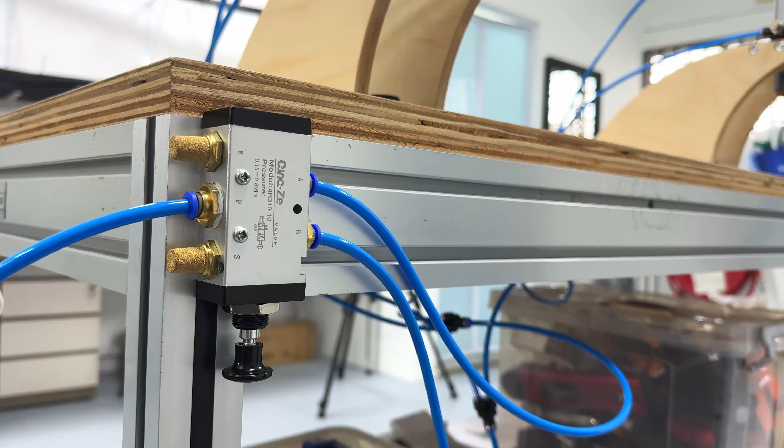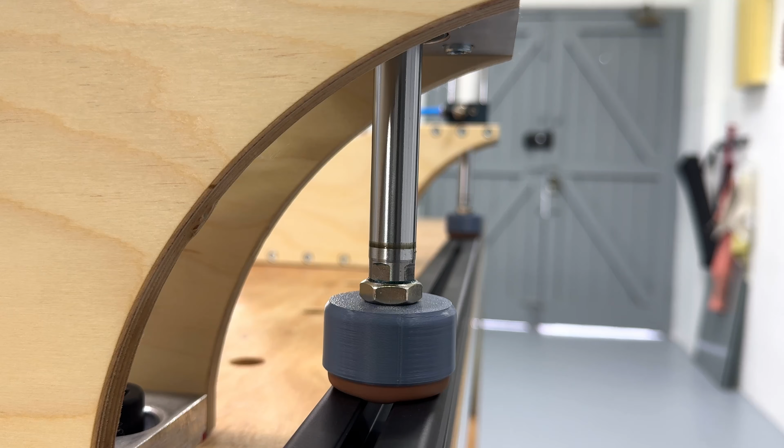One lever, and that is all it takes. Pull it, and two pneumatic clamps come down simultaneously, holding the aluminum extrusion firmly in place on the table. Push it back, and they retract, clean and instant, ready for the next piece. But it was not always this simple, and to understand why this matters, I have to take you back to

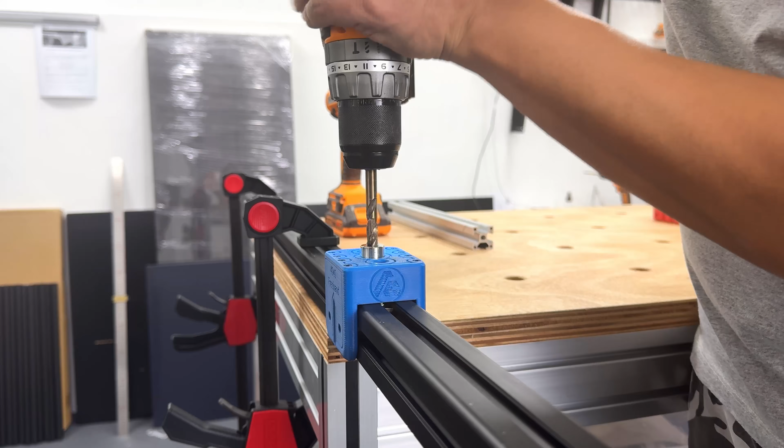where this all started. When you work with aluminum extrusion, drilling is unavoidable, and the reasons are many: blind joints, internal connections, and a whole lot more. Almost every build requires holes to be drilled, and they need to be drilled precisely, in the right spot, at the right depth, every single time.

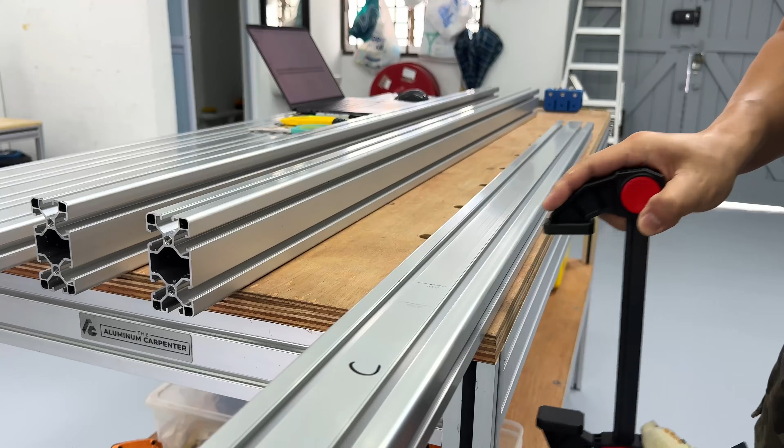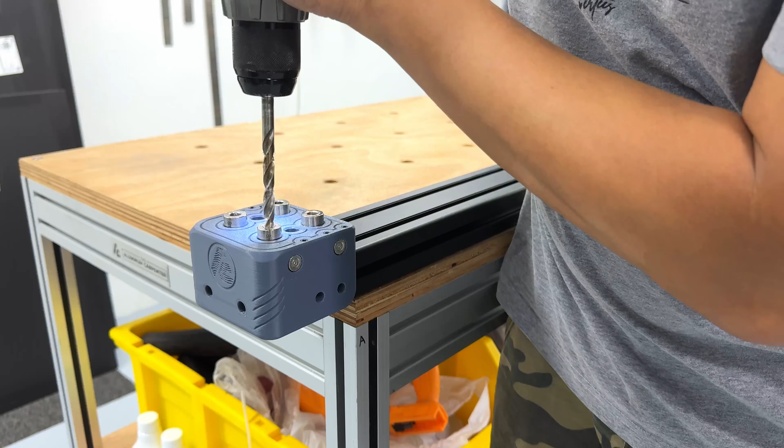And every time a piece needs to be drilled, it has to be secured first, because that is non-negotiable. A workpiece that is not properly clamped is a genuine safety risk. The drill can cause it to shift, it can slide off the table entirely, and the bit can catch, snap, and damage a piece of extrusion you have already cut to size.

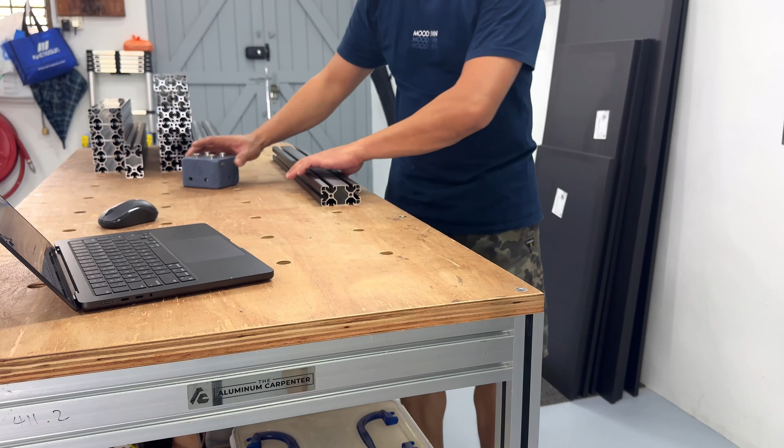My solution for years was the F-clamp, and it always took two of them, every single time. Position the extrusion on the table, place the first clamp, tighten it down, then the second clamp, tighten that clamp too, and only after that can you drill. When the hole is done, loosen the first clamp, loosen the second, walk them back to the rack, pick up the next piece and repeat the whole thing all over again.

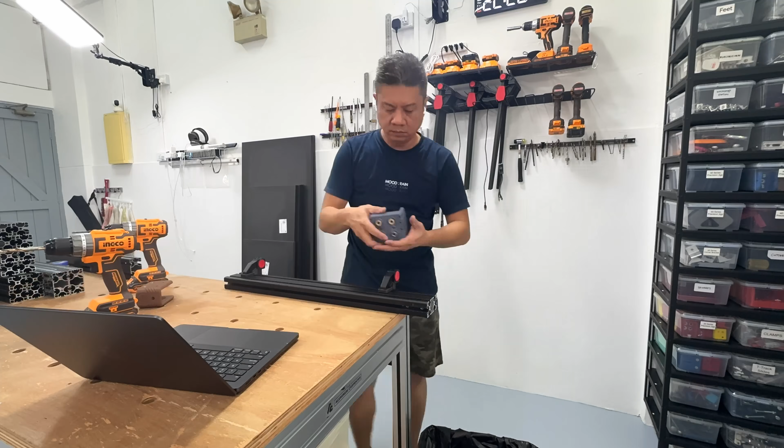And honestly, it works, and there is nothing wrong with it. But when you are processing many pieces in a single session, the repetition adds up faster than you think, and the interruption to your flow adds up just as fast. Every time your hands leave the work to handle a clamp, your momentum breaks. And in a one-man workshop, momentum is everything.

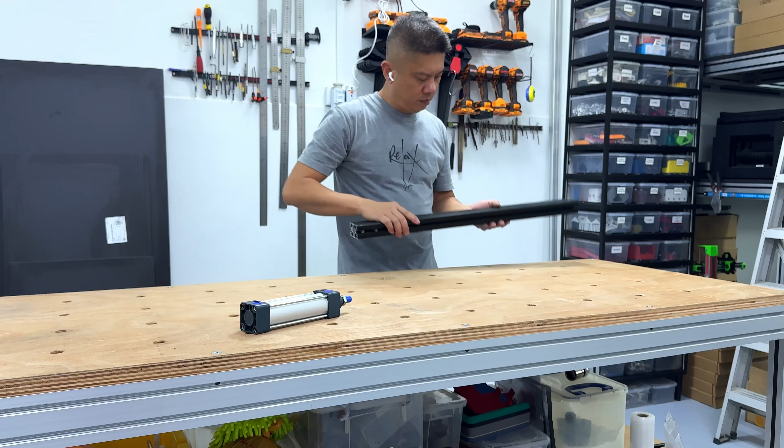So I kept thinking, there has to be a way to eliminate this entirely, and let a machine handle the clamping for me. And that thought became this build. The concept is straightforward, and it starts with two pneumatic press units mounted onto the MFT Centerpiece Assembly Table for the duration of any drilling session.

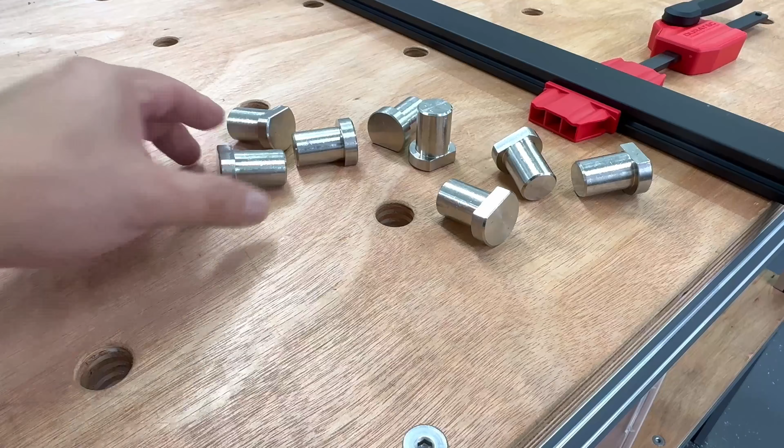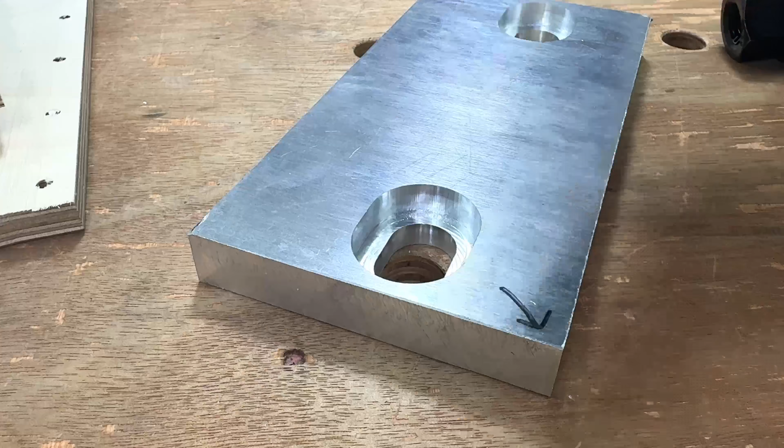If you have not seen my MFT Centerpiece Assembly Table video, I will link it in the description below, because that table is the foundation of a lot of what happens in this workshop, and it is clearly the main reason this entire pneumatic project works as cleanly as it does. The dog holes machined precisely into that table surface are what allow every press unit to be positioned and locked without any guesswork, and without any permanent modifications to the table at all.

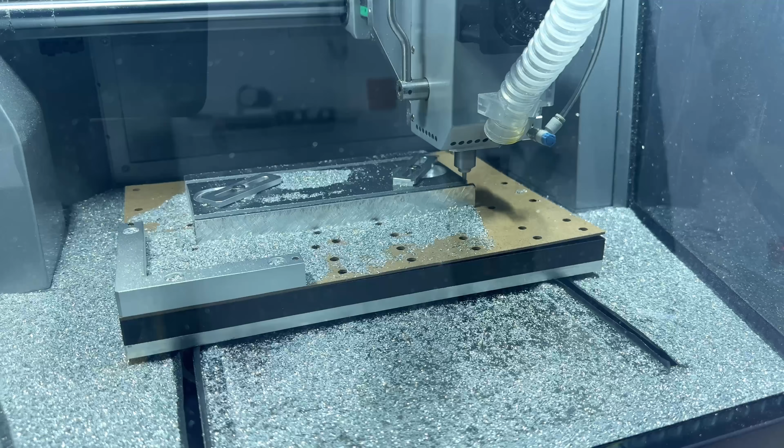Each press unit consists of one pneumatic cylinder, housed between two custom-cut birch plywood panels that form the supporting structure, and below that, a precision-machined aluminum block anchors the entire unit firmly down onto the table, forming the base, and another from the top to secure the pneumatic cylinder in position, pointing it down.

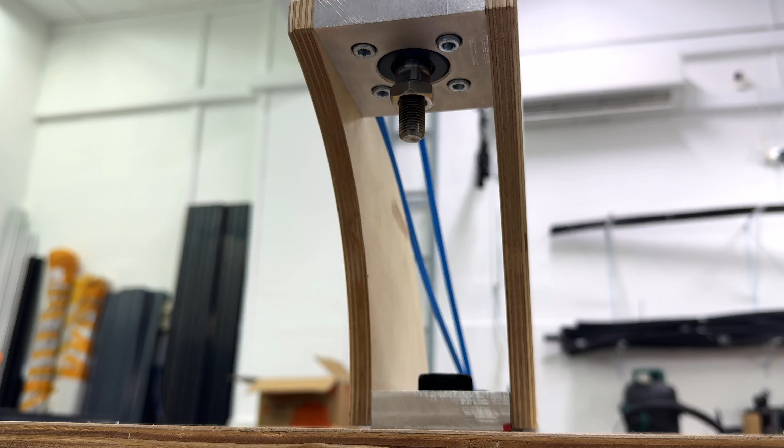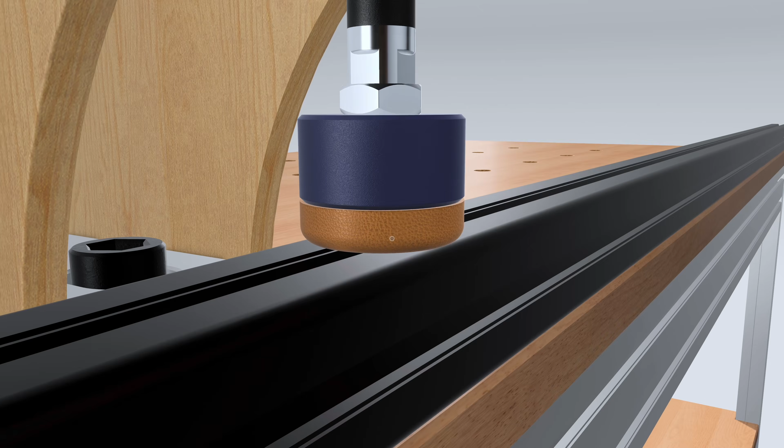When activated, the cylinder shaft extends downward, pressing a custom contact foot onto the extrusion below, and that contact foot is 3D printed with a silicone pad bonded to the tip so it holds the workpiece firmly without leaving a single mark on the surface. Both units are triggered by a single manual lever valve. Pull it, and both come down together, push it back, and both retract at the same time.

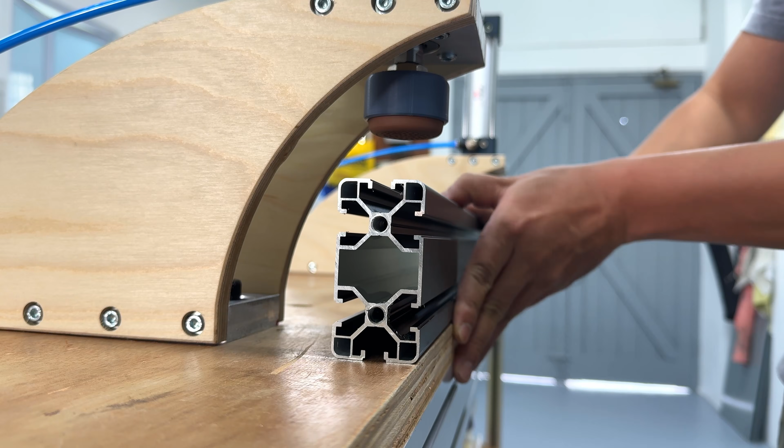The placement is deliberate, with one unit at each end of the workpiece, and in most cases, two presses are more than enough to hold the extrusion firmly in place. When a drilling session is complete, the entire setup comes off the table and goes into storage, ready to be deployed again for the next session. No permanent modifications to the table, and no dedicated space taken up between sessions.

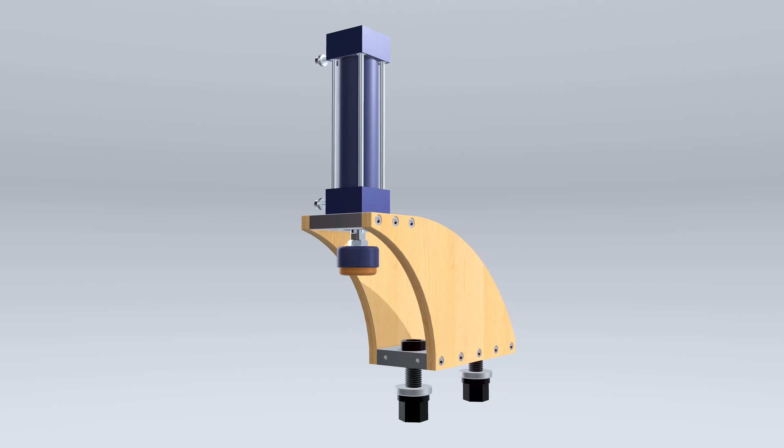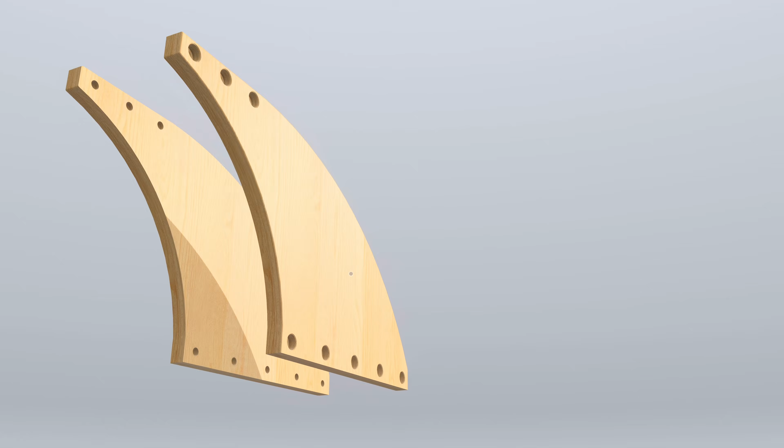Clean, modular, and practical. To make this work, certain components had to be custom-made. The aluminum blocks, machined to precise dimensions, and the birch plywood panels, cut to the exact profile needed to cradle each cylinder correctly. Beyond those, the remaining hardware was sourced off the shelf, fasteners and fittings that drop straight into the dog holes on the MFT table surface.

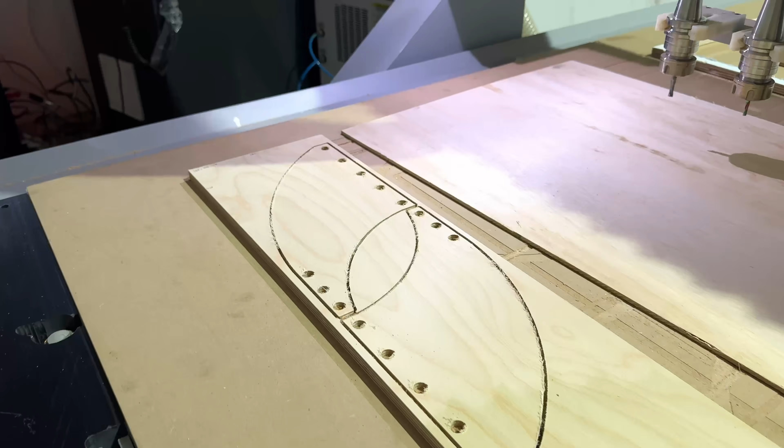Now, the plywood parts are large, far too large for a desktop CNC machine, but the aluminum blocks, those were a perfect job for this machine.

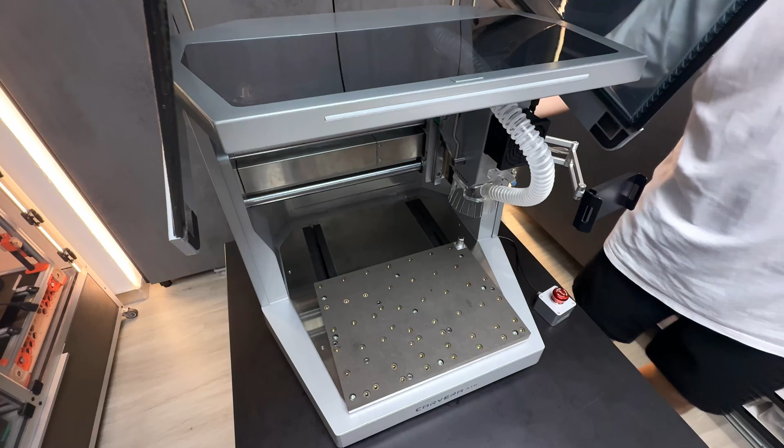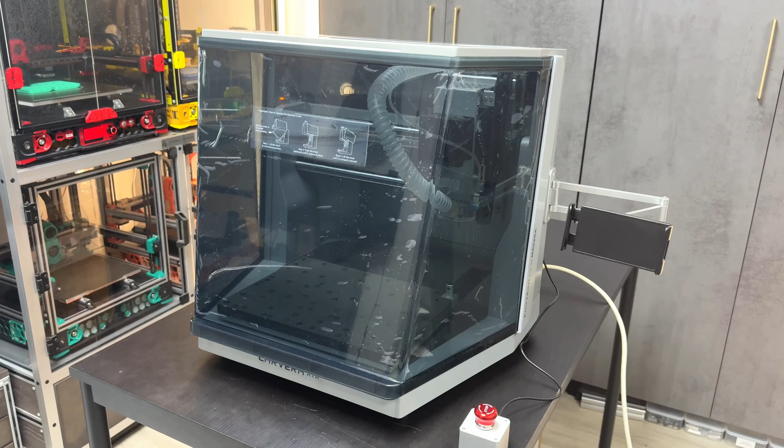And I do mean the very first time, because I have never operated a CNC machine before this project. I did not know the software, I did not know the feeds and speeds, and I honestly did not know what to expect when cutting metal on a desktop machine.

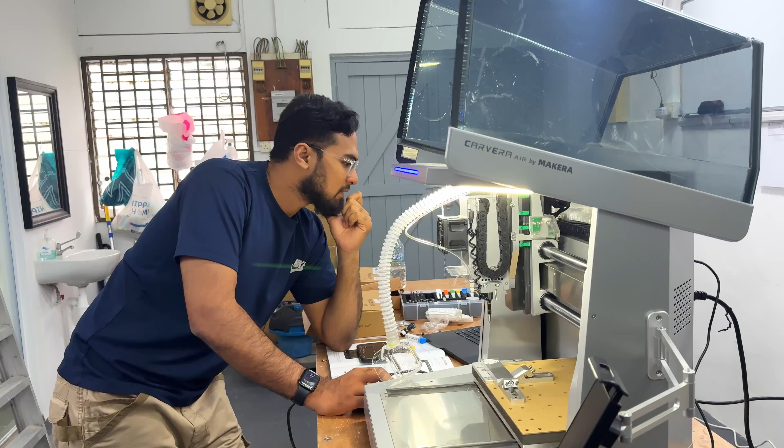Fortunately, I did not have to figure it out alone, because this is Iskons. Iskons is a maker and fabricator who works with large industrial CNC machines. And when I brought this project to him, he stepped in immediately. And without him, none of what you are about to see would have been possible.

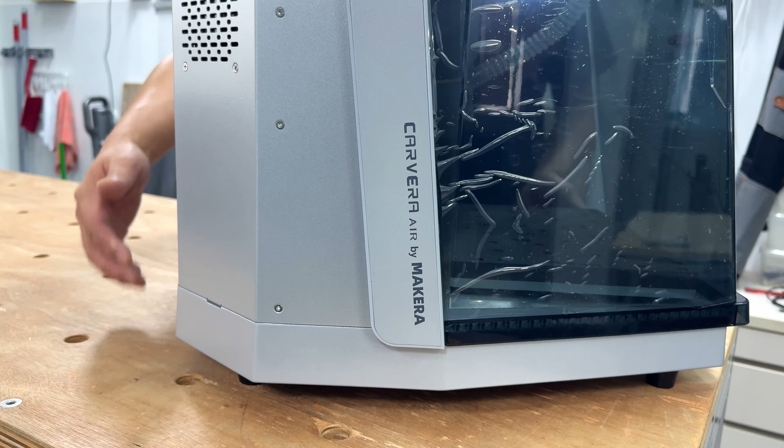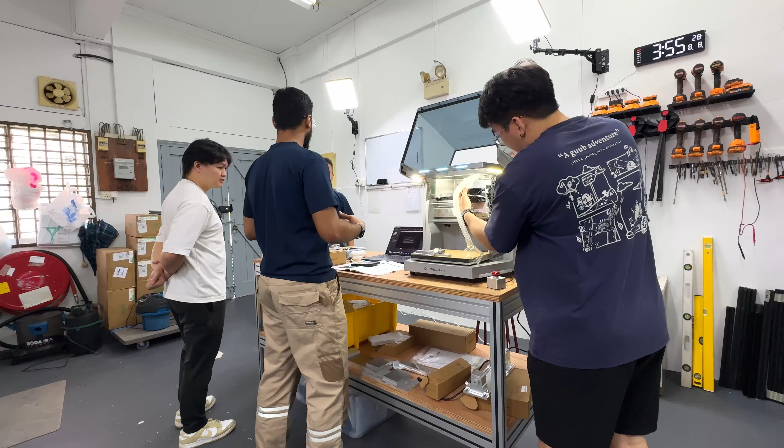The Makera Carvera Air is a desktop CNC machine, compact enough to sit on a workbench, enclosed for safety, and designed to handle a range of materials, including aluminum. And that last part is what mattered most to me, because aluminum was exactly what we needed to cut.

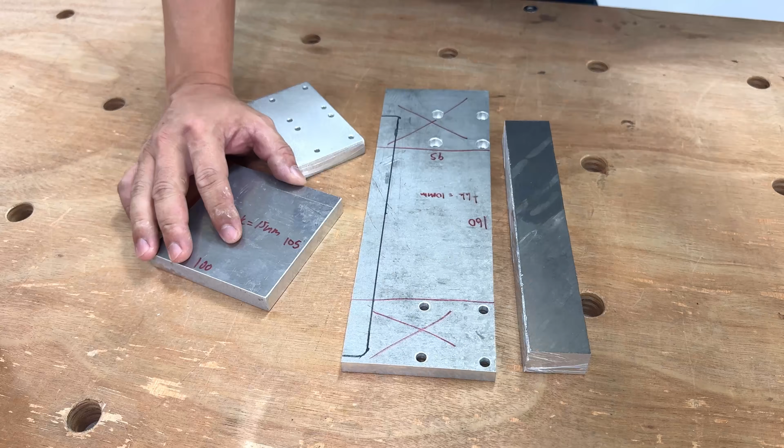We loaded the machine with the design files, set up the first block of aluminum, and these are salvaged material from previous aluminum projects, so nothing really goes to waste. And we immediately got to work. And what happened next was not entirely smooth, but that is the honest story, and I'm going to tell it to you exactly as it happened.

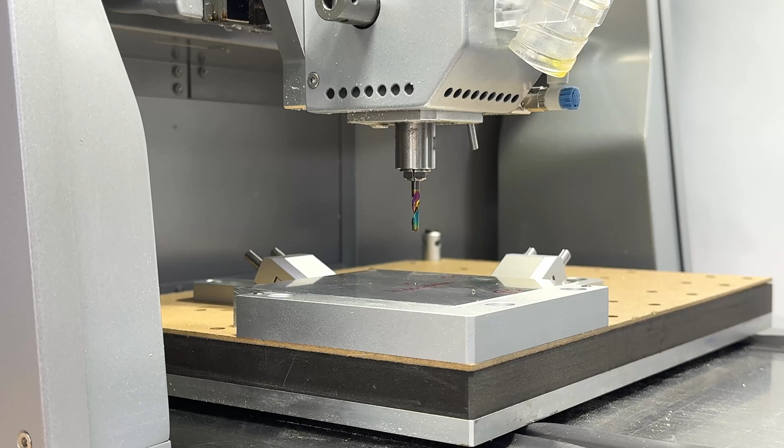Aluminum is unforgiving, and I say that with respect. Cut too fast, and the bit overheats and snaps. Cut too slow, and the material work hardens, which also destroys the bit, and the window of acceptable feeds and speeds is narrow, so finding that window costs bits. And we went through several of them before we found the right combination.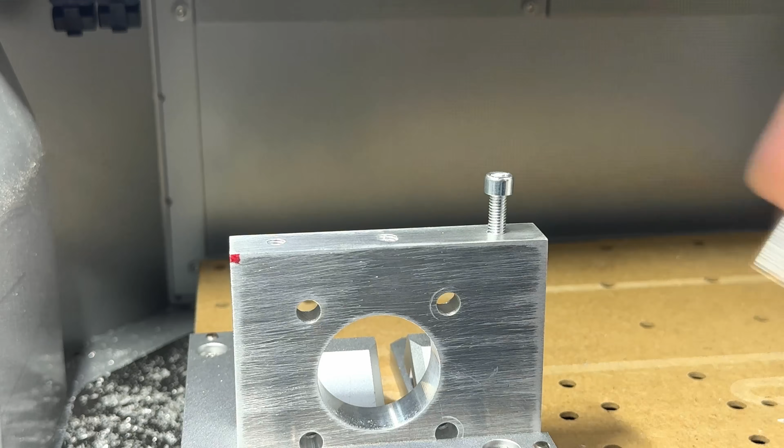Each broken bit was essentially a data point. Too aggressive, back off, try again, adjust the depth of cut, adjust the feed rate, run a test pass, and evaluate. Iskons drove this entire process, and his years of experience with industrial machines gave him the instinct to know exactly what the machine was telling us. The sound of a healthy cut versus a cut that was about to go wrong.

And when we finally found the sweet spot, the difference was immediate. Clean chip evacuation, consistent cut depth, and the Carvera Air working exactly as it should. The aluminum blocks came out precise, with sharp edges, clean faces, and accurate dimensions. Exactly what the design called for, and for a desktop machine cutting salvaged aluminum blocks, that result genuinely exceeded my expectations.

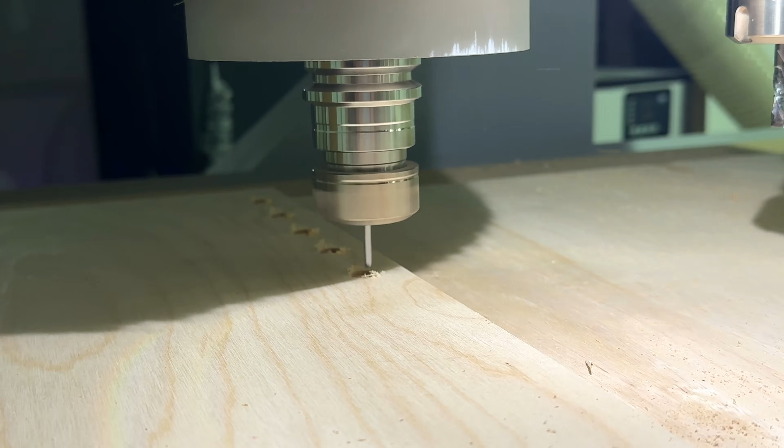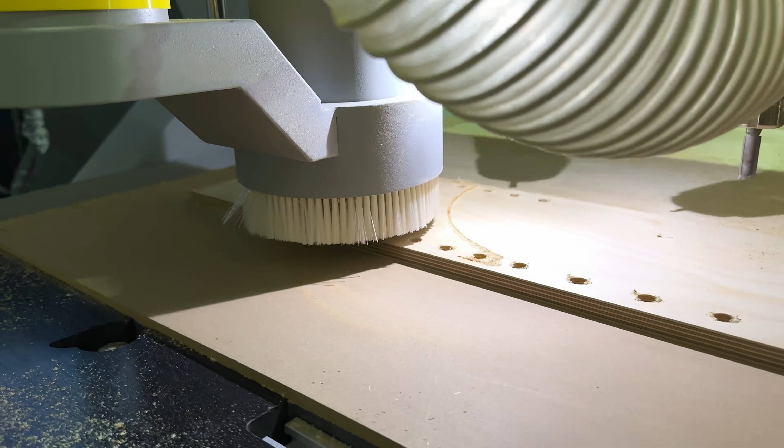While the Makera handled the aluminum, the birch plywood panels were cut on a completely different machine, because Iskons runs a large industrial-grade tool changer CNC in his own workshop, and that machine cuts through birch plywood without breaking a sweat. The plywood panels that form the housing for each pneumatic cylinder were cut on that machine, because they are far too large for any desktop CNC, including the Carvera Air. And between the two machines, every custom-cut part in this build was fully covered.

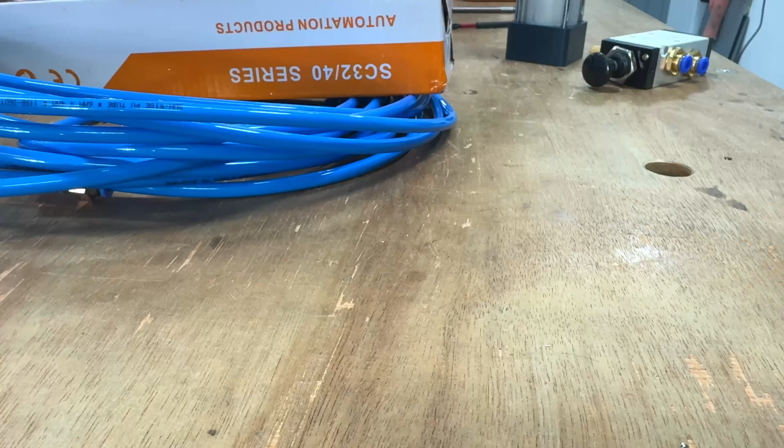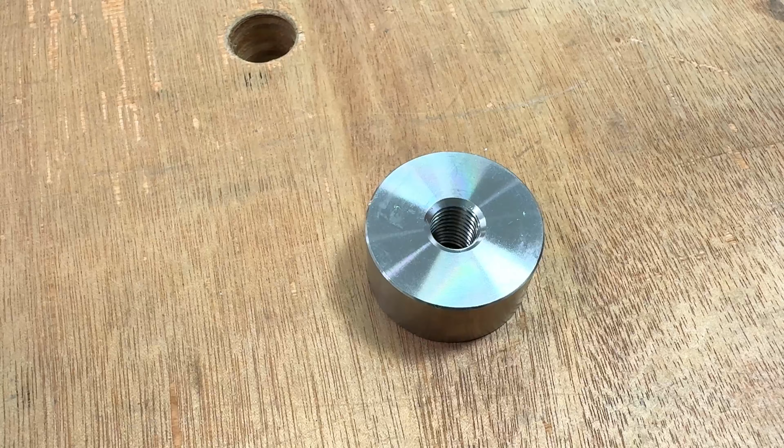The remaining components were sourced off the shelf: the pneumatic cylinders, the fittings, the airlines, and the manual lever valve that triggers both units simultaneously. Standard parts, proven parts, and nothing exotic. Except for one: the press foot. My original intention was a full metal press foot, a stainless steel part with an M12 threaded hole through the center, designed to thread directly onto the pneumatic cylinder rod.

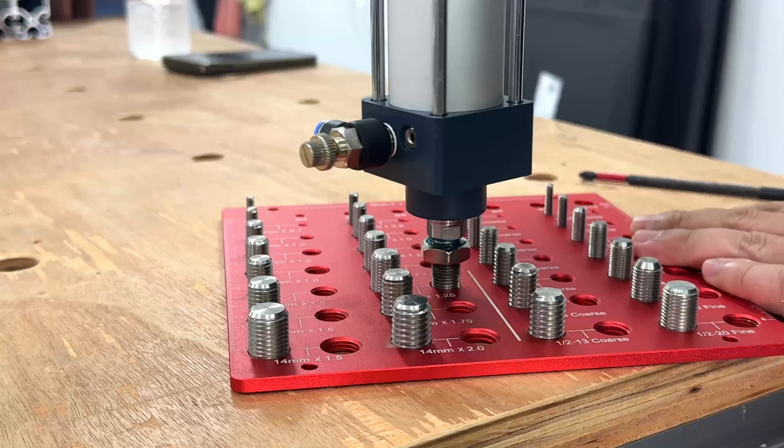I sourced the part, it arrived, and the thread pitch was wrong. M12 was correct, but the pitch was not 1.25 millimeters, which is what the pneumatic rod requires, and the part looked right, it measured right, but it simply would not thread on.

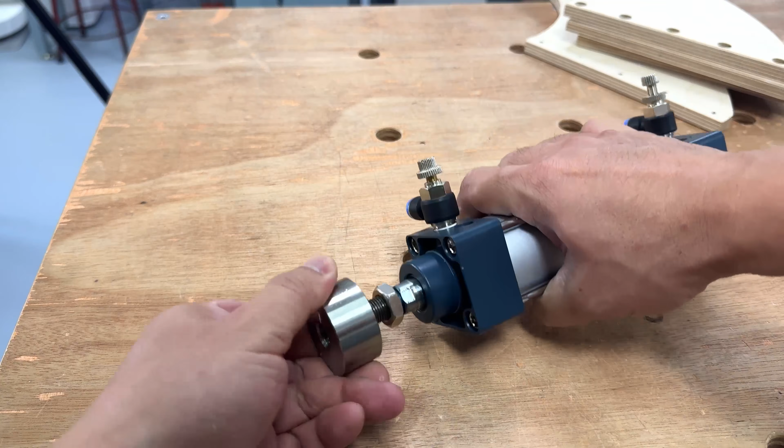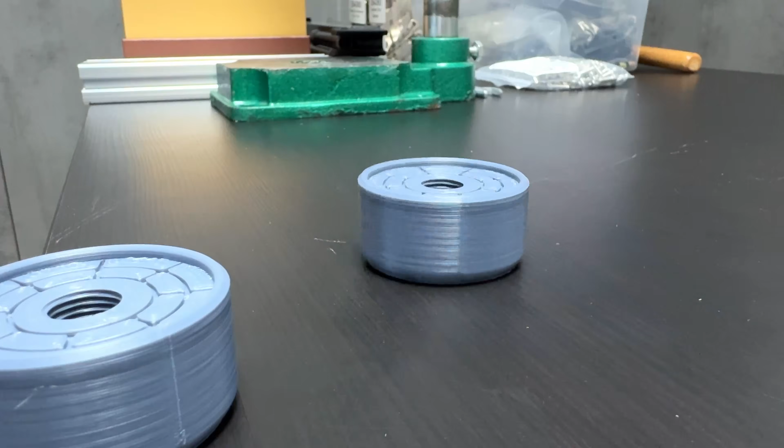So rather than hunt for a replacement part with no guarantee of finding the correct pitch, I did what made more sense. I opened Shapr3D, modeled a custom press foot from scratch, and printed it. I made 3 pieces, with one for spare, with the threads already created in the hole, and brought them to the workshop to test. And yes, I made modifications to the initial design to fit the silicone pad.

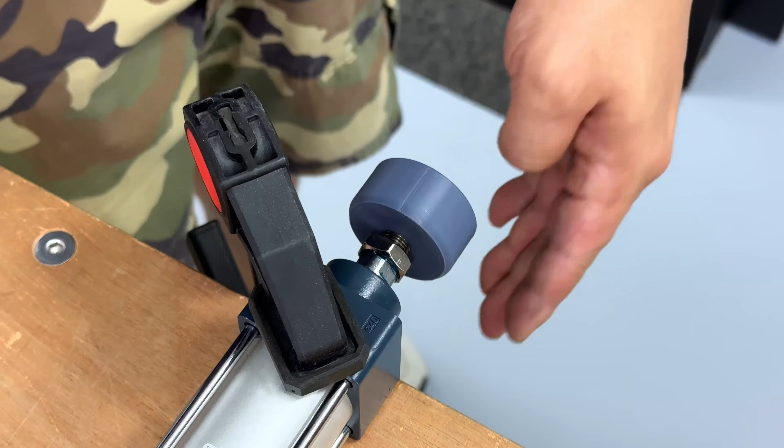The 3D printed part fits perfectly onto the M12 rod, and a silicone pad is bonded to the contact face at the bottom, because that is the surface that touches the aluminum extrusion during a press. Soft enough not to scratch, but firm enough to hold. And sometimes the right part simply does not exist, so we have to make it. And in the case of this project, most of the critical parts had to be made from scratch.

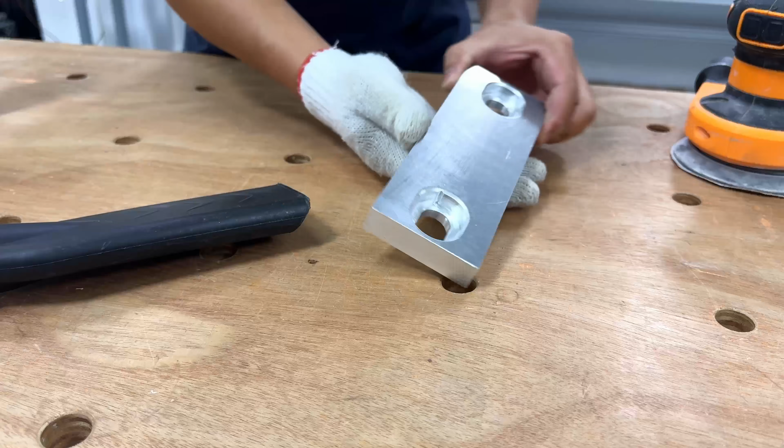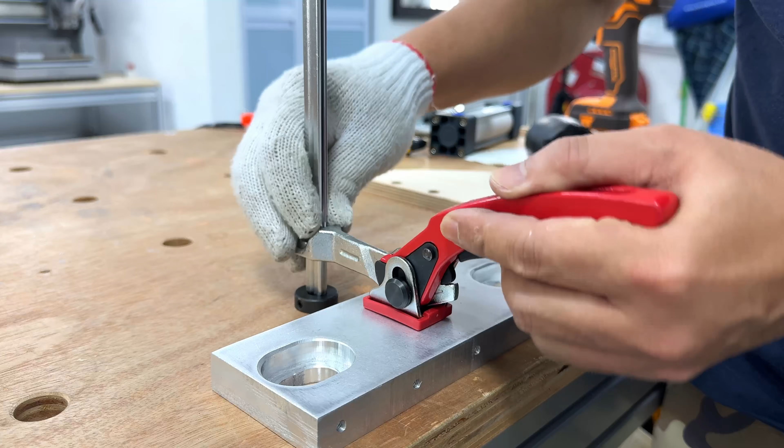With all the parts ready, it was time to put everything together. And it starts with the aluminum base blocks going down first, sitting flat on the MFT table surface, located precisely using the dog holes, with no drilling into the table and no permanent modifications whatsoever. The birch plywood panels mount next, forming the housing that cradles each pneumatic cylinder, and the second aluminum block is secured from the top, locking the cylinder firmly in position between the two.

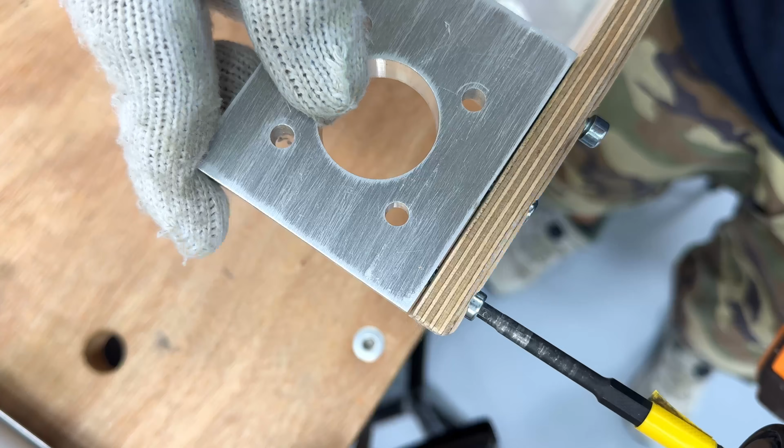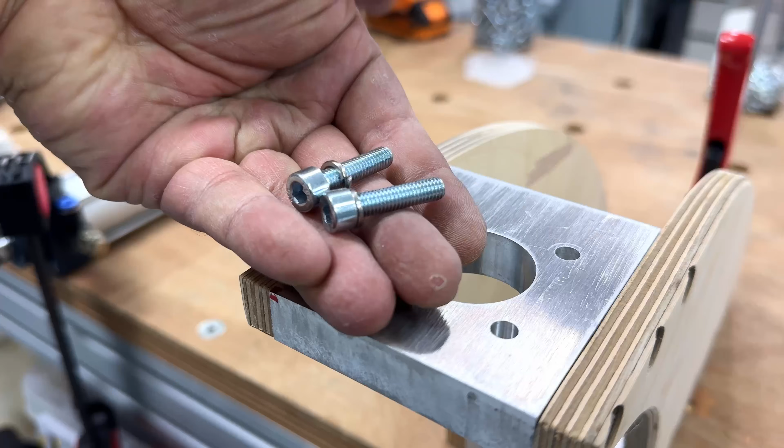But before we can put on the cylinder, the assembly must be fully secured first, and this is safely and easily done with one MFT clamp, holding everything firmly onto the tabletop while I work through the build. 4 M6 bolts will be used to mount the pneumatic cylinder onto the setup, and all the airline connectors will be pointed to the back so they do not get in the way of the action happening up front.

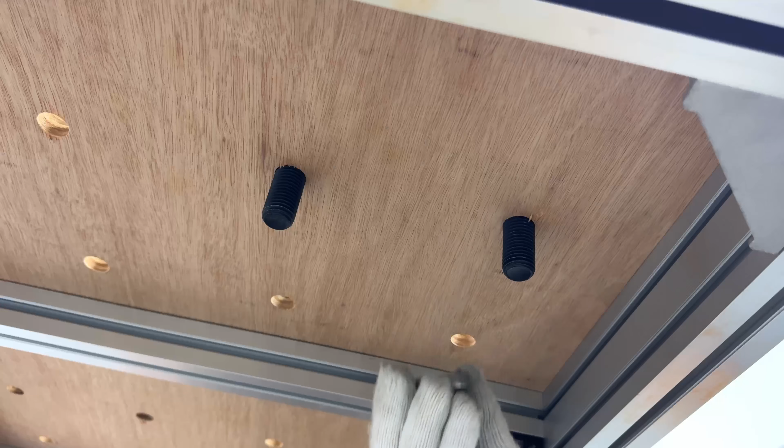After that, one unit is complete, and to lock it down to the table, these large bolts, washers, and nuts will be used, going through the MFT holes. And what's the last item? Yeah, you guessed it right, the press foot.

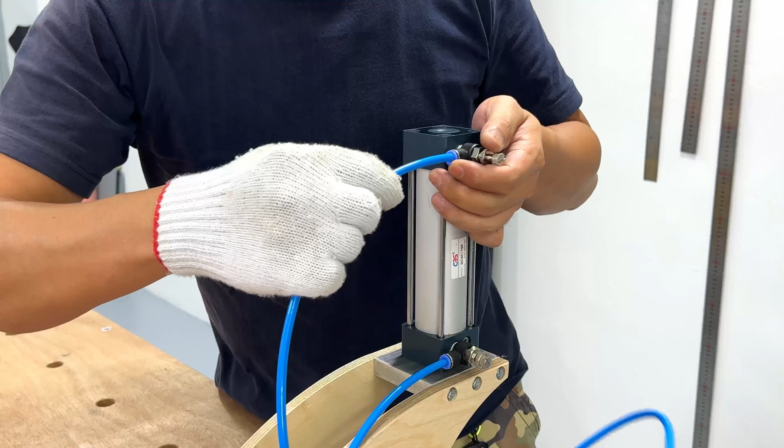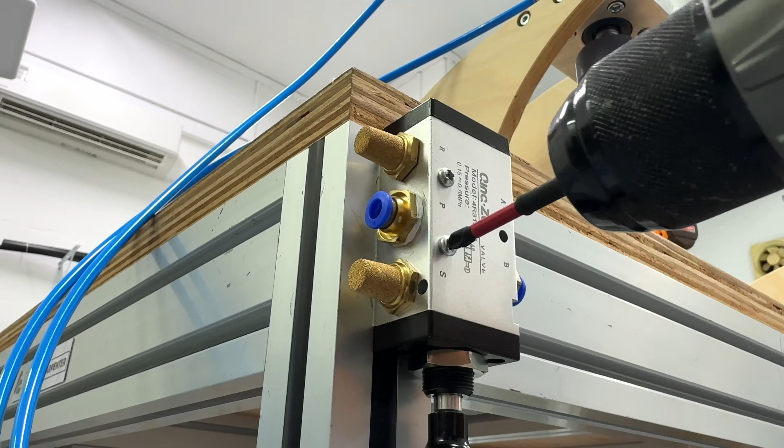From there, the air lines are routed between both units and connected to the manual lever valve. And this is really the component that ties the entire setup together, because it is one lever controlling two cylinders moving as one. The press feet thread onto each cylinder rod, hand tight and checked, with the silicone pad facing down. And when both units are on the table, the air line connects to the workshop compressor.

And for the very first time, the setup is live. 2 units, 1 lever, and everything moving in unison. And honestly, this is the moment the idea stops being a drawing on a screen and becomes something real. And this is what it looks like in practice.

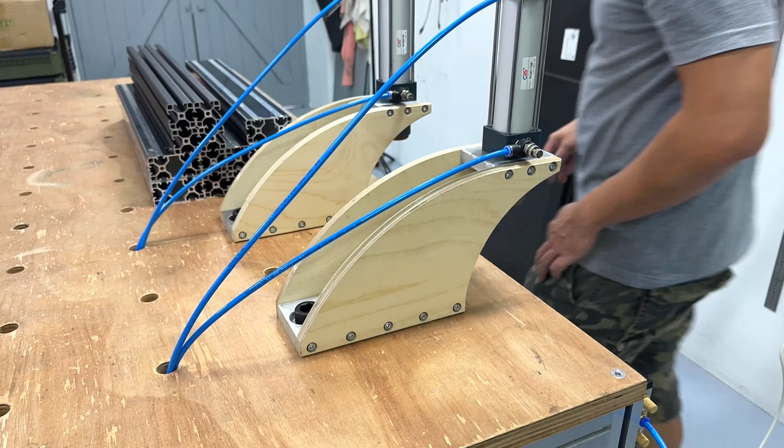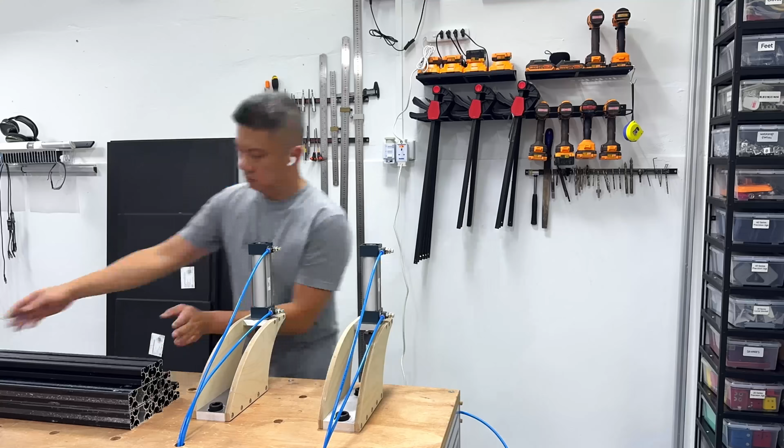The extrusion goes on the table, the lever is pulled, and both clamps come down simultaneously with consistent pressure, locking the workpiece in place. No reaching for clamps, no positioning, no tightening, just drill. When the hole is done, push the lever back, the clamps retract, the piece comes off, and the next one goes on. And the rhythm is completely different now. There is no interruption, no break in focus, and the hands stay on the work where they should be.

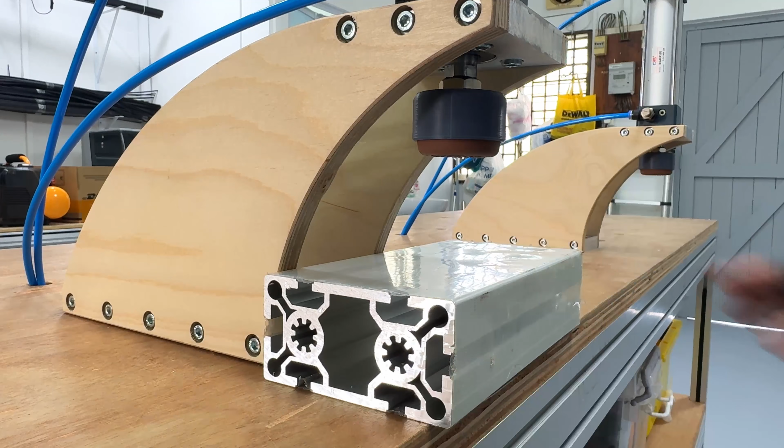What used to require 2 F-clamps, 2 hands, and multiple steps is now 1 lever and 1 second. And because the press feet are silicone-tipped, the extrusion surface is protected throughout, so no marks, no scratches, just clean, held, and drilled. The F-clamps are still in the workshop, but they no longer run the workflow because that job now belongs to this.

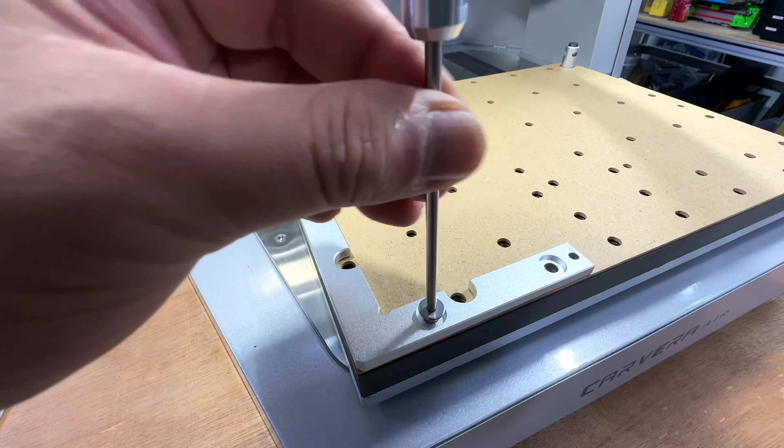If you are considering the Makera Carvera Air, I will leave my honest summary here. It is a desktop machine, and it will not replace an industrial CNC. But if you have a project that requires precise cuts on aluminum at a scale that fits a workbench, it is capable. We pushed it, we broke bits finding its limits, and when we found the right settings, it delivered clean and accurate results. And for a first-time CNC user working with a machine I had never touched before, that outcome honestly speaks for itself.